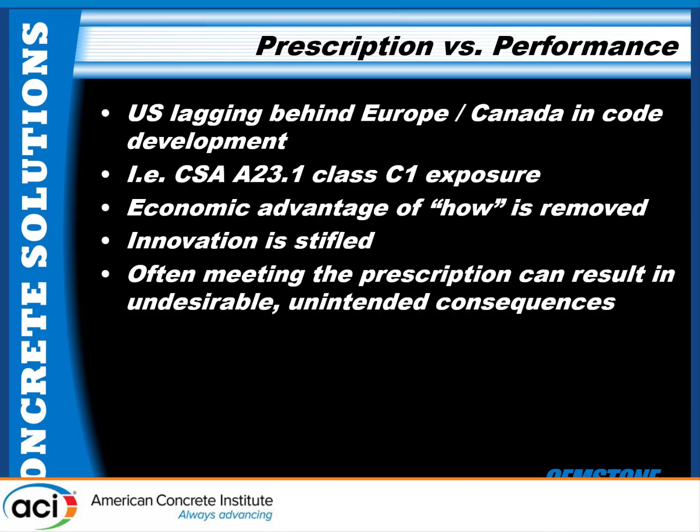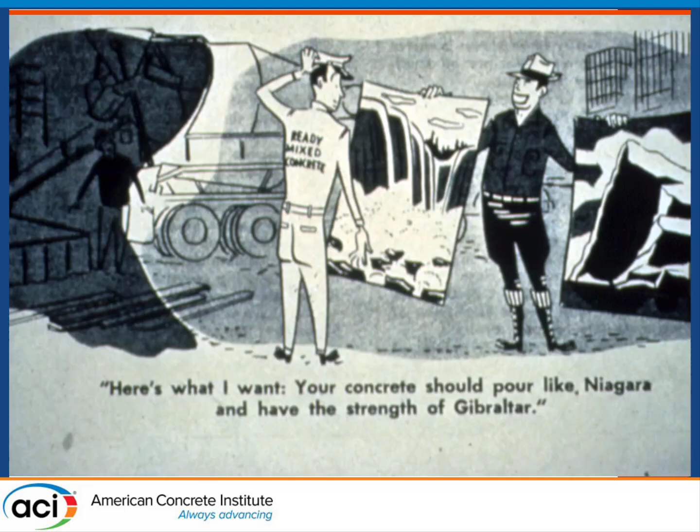Now, performance-based specifications have been around for a long time. This is a cartoon that was quite popular when I was in the ready-mix business. You could tell you were a ready-mix concrete producer because you had that hat on. And this gentleman, being a very good Canadian, says, I want your concrete to pour like Niagara, have the strength of Gibraltar. It's pretty straightforward, right?

We're not making this change because we don't like Portland cement. Portland cement is cheap, it's effective, it's available almost everywhere, it's somewhat predictable. We're making this change because we want to reduce emissions and reduce our energy needs, and history tells us, because the history of the development of Portland cement tells us, that we are going to encounter problems that we don't know exist right now.

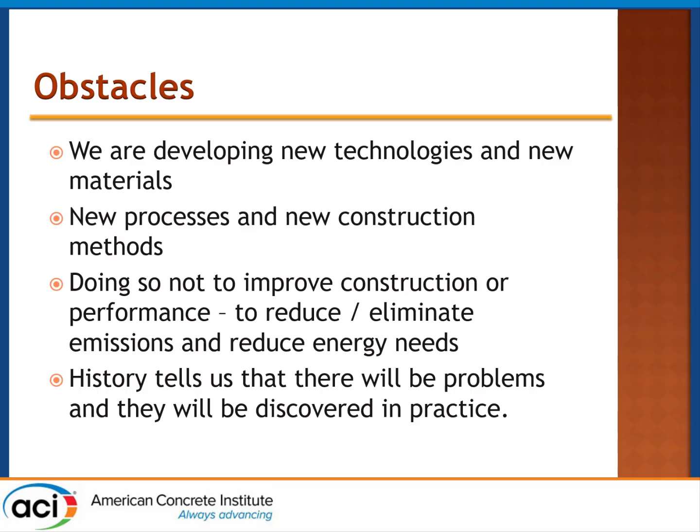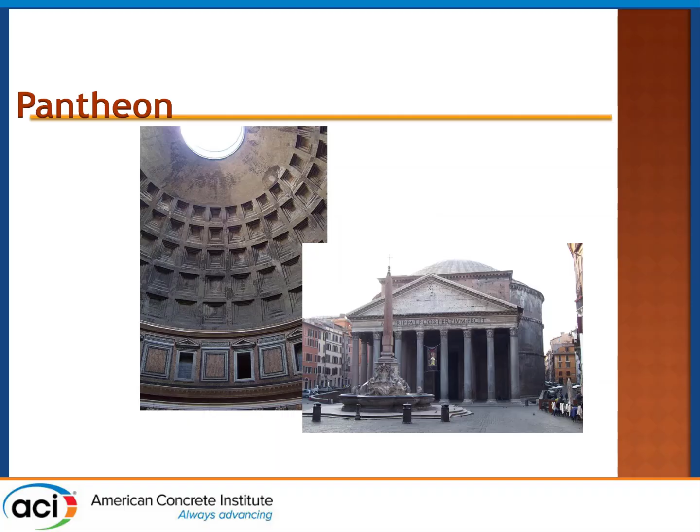Of course, we've been using concrete for a very long time. The Pantheon in Rome, it's got some lightweight aggregate in here, which no doubt was done to reduce the amount of cementitious material, hydraulic cement, and therefore reduce the carbon footprint of the structure. But for whatever reason, there's a lot of things that have been done for a long time, but we still use this device.

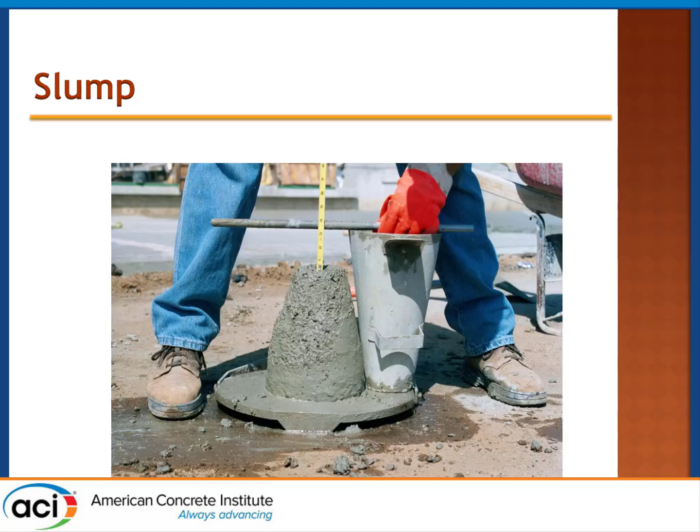And we will use this device for the foreseeable future. And it's been around for a while. Some of you may not have the 1929 version of the Design and Control of Concrete Mixtures, but it has the same table that you will find in ACI 211.

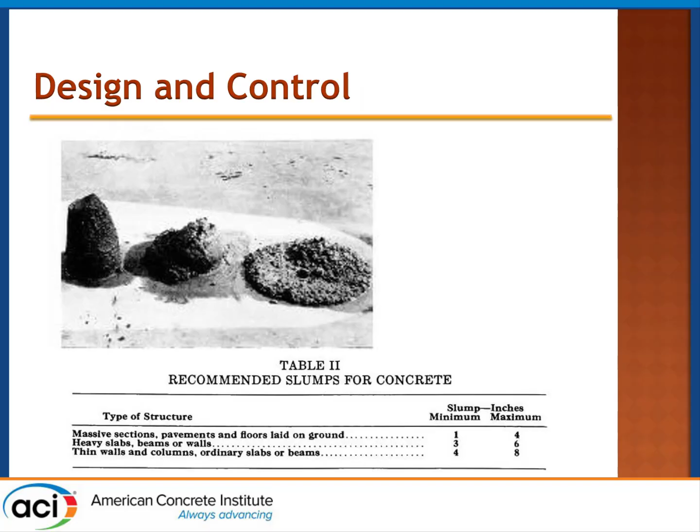A modern way of specifying it, because we can change that slump without changing the water, unlike 1929, is just to say, make the slump whatever is fit for the intended use, and designate a range.

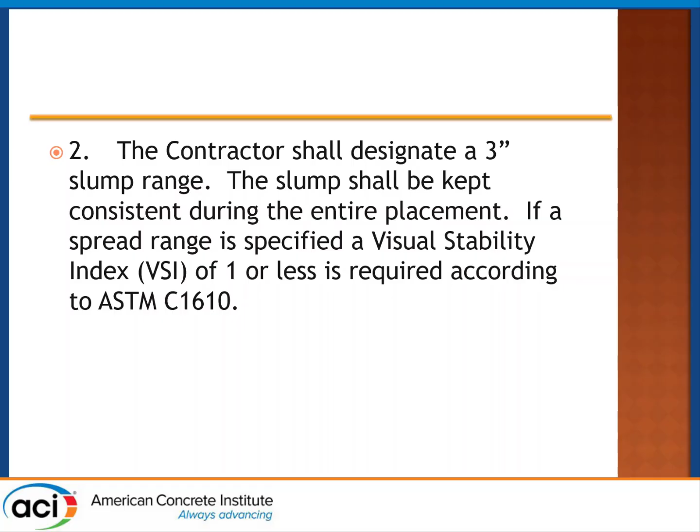And then if you're in the ready-mix producer business, if you keep getting a different slump and you think you're doing the same thing in each batch, one of those two things is true. And so you need to be aware that performance-based specification is where we're going to have to go, and it's going to require a change in construction methods.

The point being, if you don't communicate early on with the people that are going to construct the building, that are going to maintain the building, that are going to design the building, we can run into problems. It's going to necessitate more communication in terms of what is our concrete going to do, because we all know, right? We have a rule of thumb that, for Portland cement, your 7-day strength is 2/3 your 28-day strength.

That is true for mostly Portland cement mixes, even with a little bit of fly ash, a little bit of slag, or maybe a little silica fume in them. But I'm going to show you one example, and give you some case study examples.

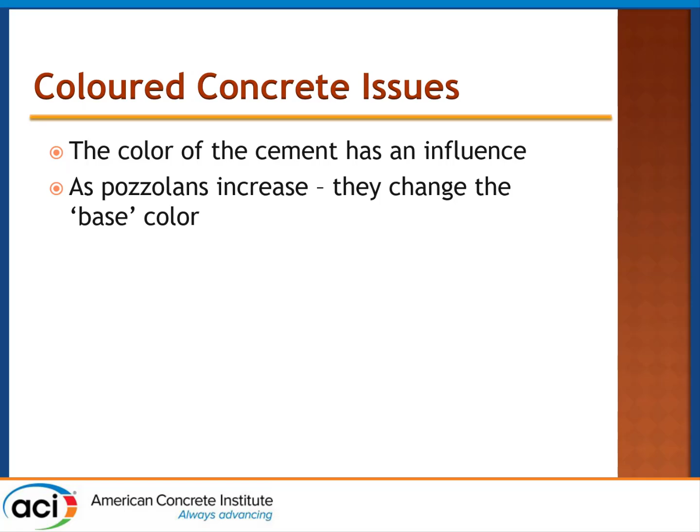The color of your concrete is dependent on two things: the pigment loading and the base color. This is a slide from Cemstone that has a very pretty printed chip, just like you'd get at the hardware store, showing you the color of the paint.

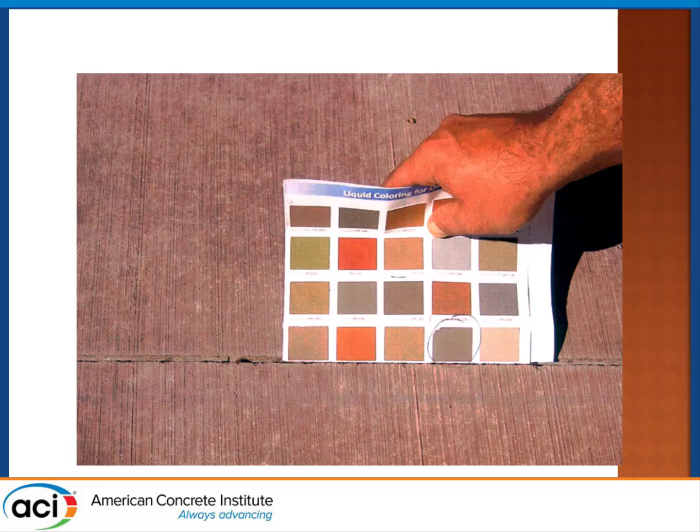The salesman told me, when I said this was a bad idea, that no one would ever hold this up against the concrete and take a picture. It only took four days. So we had a warning on the color card that said the result is going to be dependent on the base color of the concrete. It affected the color massively.

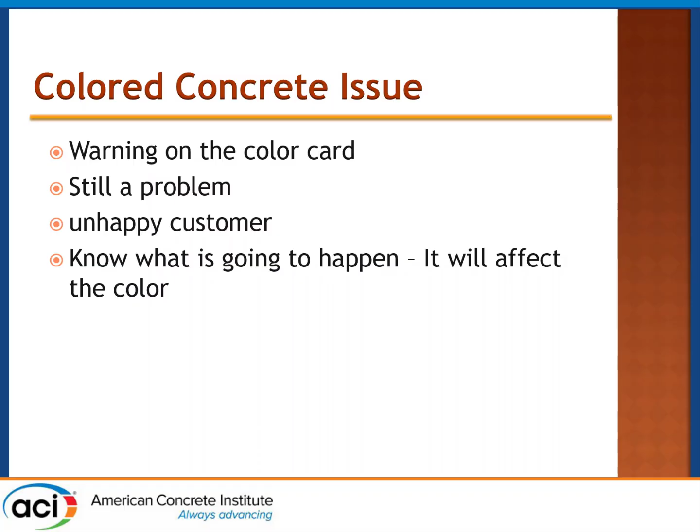What was the problem with those colors as we went to high volume fly ash in interior concrete mixes? People wouldn't like the color, and so what would we do? We would tear it out and do it again. So no matter how much clinker we didn't use the first time, we ended up using a lot more by doing it the second time. Plus, everybody wanted that. But that's not really why we're here.

We're here for structures like this. I've been doing low emissions concrete for a long time. This headquarters building, built in Minnesota during the fall and winter of 2003, is high volume fly ash, 65% fly ash.

Great River Energy owned power plants, and some of their power plants sat in Wyoming on the Powder River Basin, where the coal is very consistent. Therefore, the fly ash was very consistent from their base-loaded plants. And they said, I want this building to have as much fly ash in it as possible.

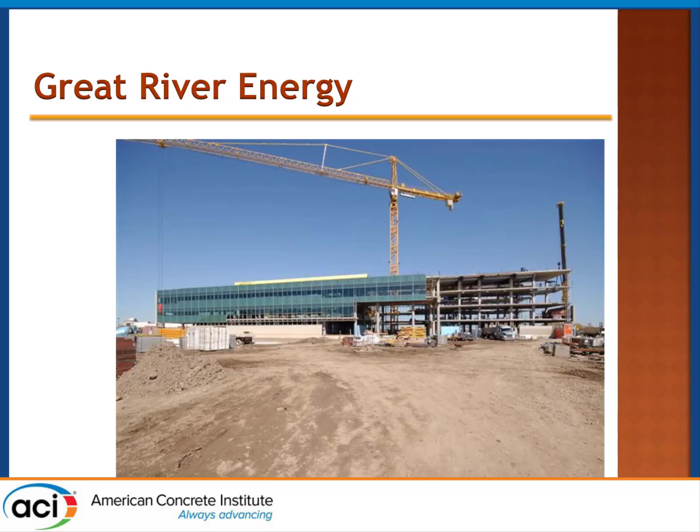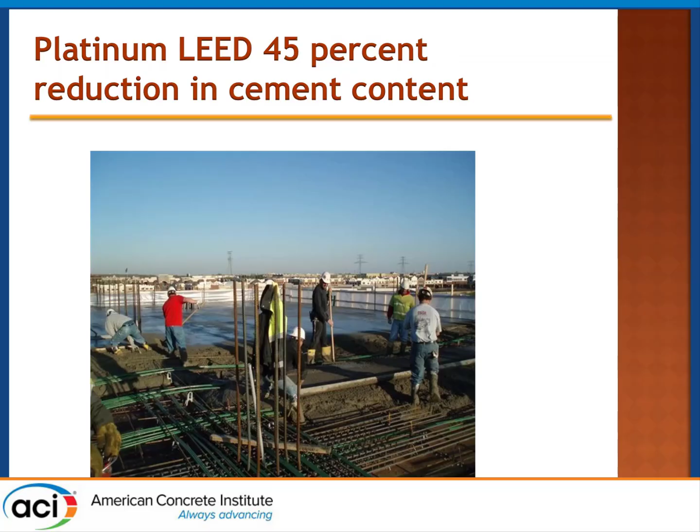The architect called me up and said, how much can we put in? Thinking, I want to go from 25 to 35. And I said, well, 65 without doing too much work, and we could probably do better than that. So we had a target for platinum LEED. It was a 45% reduction in our cement content, our ground clinker and various other things, and we met that requirement, and the owner was very happy.

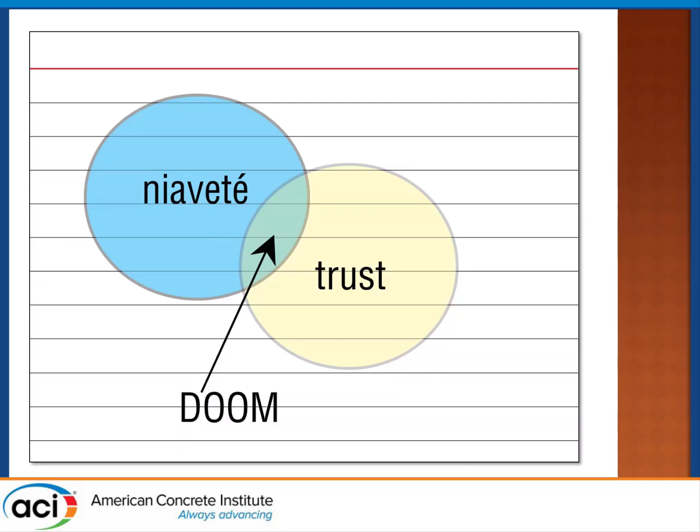The problem is that sometimes you can end up having an issue. Now, this is 20 years ago, and of course we say, well, we'll go to 60% replacement, but you only want 45, so we'll up the cementitious material, which isn't the biggest change.

However, I then gave a presentation in a room much like this one, and I put up the mixture proportions, and somebody very carefully transcribed them down in writing. Then they said, now I have a recipe for making that high volume fly ash concrete. And we listed the admixtures that were used. They only changed the admixtures - cementitious material source, same fly ash.

But if you go from a polycarboxylate, which has a tendency to accelerate, and switch that in with a lignosulfonate, a wood-based material, it isn't quite the same.

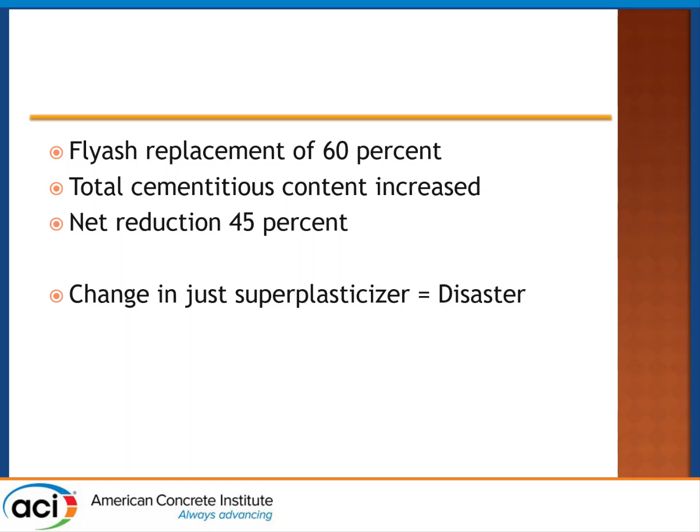And then to make it worse, this next placement was done in the winter, in February. So on day three of the concrete not setting, the contractor called me up. I was working in the ready-mix business at the time, and he said, your concrete isn't setting. And I said, what are you talking about?

You used brand X for that project. Right, but they used your concrete and it's not setting. You've got to come down here and fix it. So being the engineer, right, I got to go solve the problem. I can't just tell them to go away. And so we ended up heating it up.

And of course, that was simply retarded by the presence of the admixtures. Here was a mixture that had worked very well - the contractor was extremely happy with the way it performed. Change one little ingredient, don't do any trial batching or trial placement, and you end up with trouble.

Of course, anyone notice the problem with the winter concrete? Do you see the top of the footing is already turning white, which means it's already frozen? But that's okay.

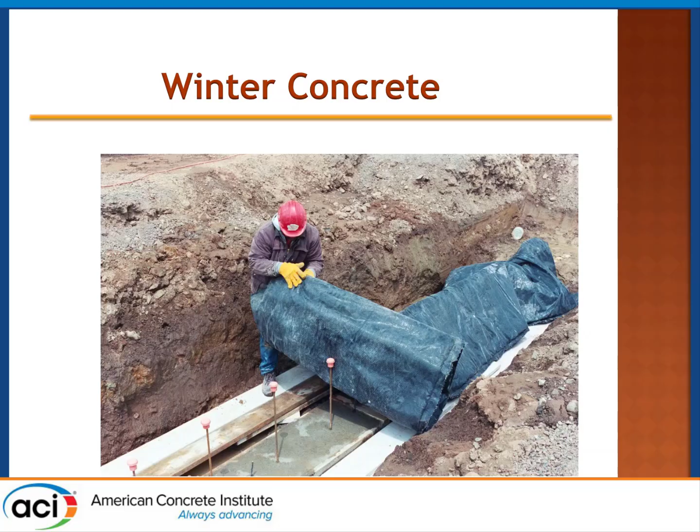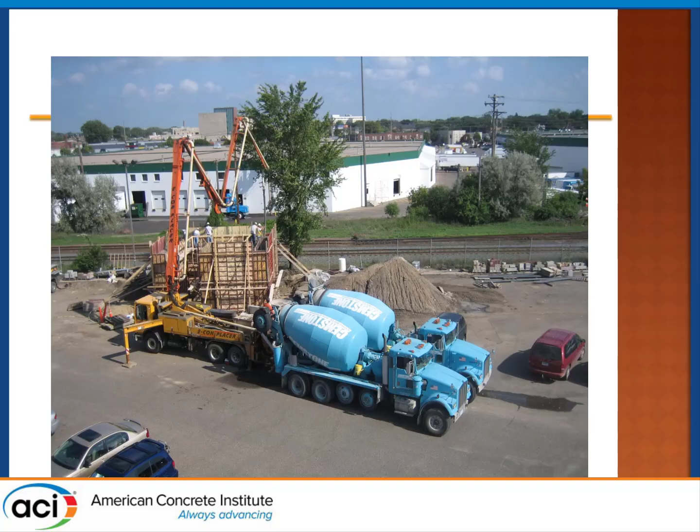A colleague of mine, Dick Staley, had to build a radiation bunker at their facility in St. Paul for holding their nuclear density gauges. He said, what would be really cool is if we made concrete that is as environmentally unimpactful as possible. This would have been 2005. So we made concrete that has almost nothing in it - it has 2% by mass virgin material. All the aggregates are recycled, all the water's reclaimed. The only new material is a little bit of Portland cement and a very little bit of admixture.

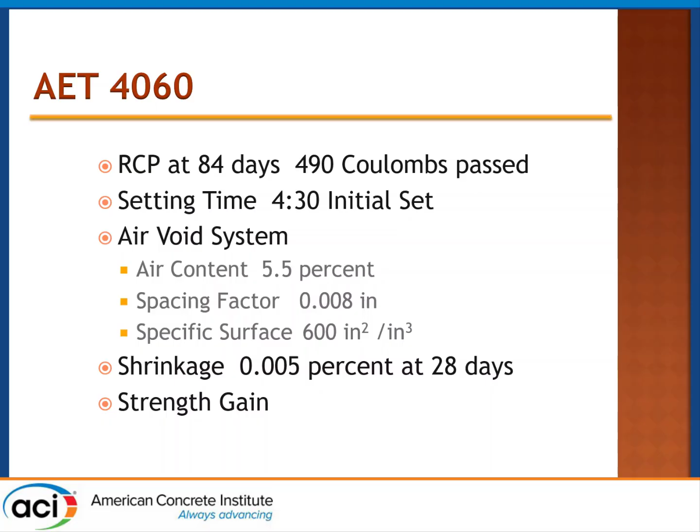He ran a bunch of tests for us, and we got rapid chloride permeability at about 490 coulombs passed. Setting time was reasonable because we knew what we were doing. This was based on concretes we've been doing for mass concrete that were about 15% by mass Portland cement, about 580 total cementitious. Air content looked good, and the strength gain was fairly respectable. Out at 90 days, we're about 4,500, and these are laboratory cured cylinders - we're going to come back to laboratory cured cylinders in a minute.

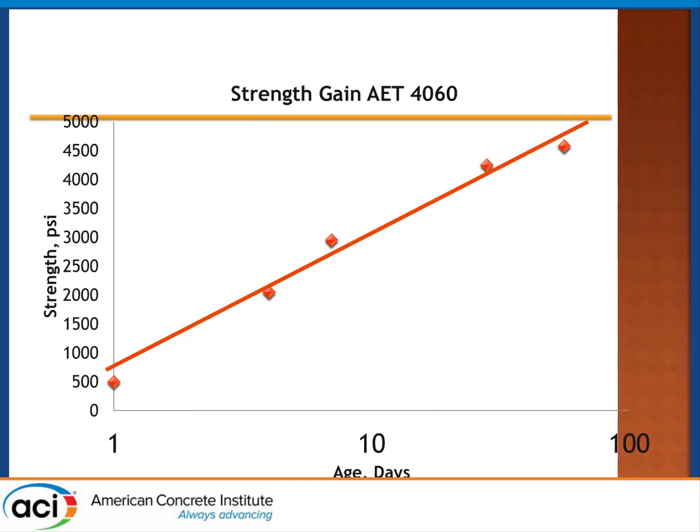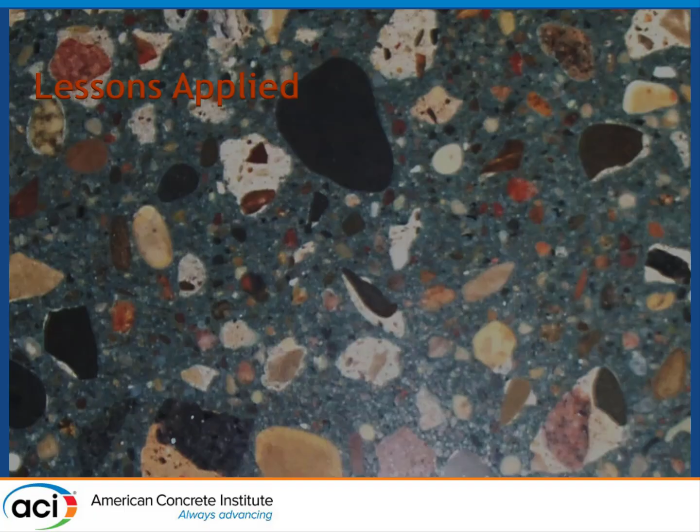The concrete looks really nice. You can see the very green-blue paste that's full of slag and the recycled aggregate paste. Some of those recycled aggregates are completely stripped of paste fraction, and some of them are all paste fraction.

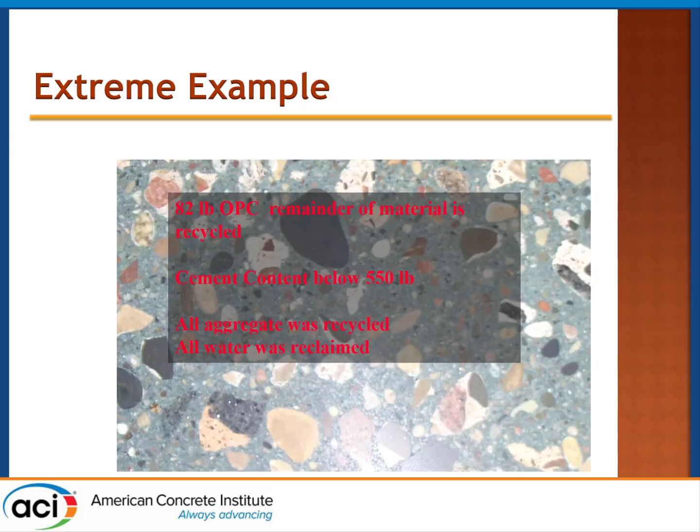82 pounds of ordinary Portland cement - everything else was recycled, all the water was reclaimed. We were surprised - we've been doing this for mass concrete, and we were surprised at the durability. This led to us designing a bunch of concrete for a bunch of high-performance bridges throughout Minnesota.

I'm going to attract your attention to just a couple of these mixes. This first one is 80 pounds of cement, 360 pounds of slag, 90 pounds of fly ash, total 530 - it has 4,000 PSI laboratory cured strength at 90 days. There's another good one here, specified to be 7,000 PSI at 56 days.

It has a little bit of silica fume, a little bit higher cement content, and this material is used in post-tension transfer beams on the bridge that have to be pulled at an age of 2 days. So obviously, if you're only getting 6,300 PSI at 28 days, you must not be getting very much early on - but that's not the case. You were able to design the mixture so we got great performance.

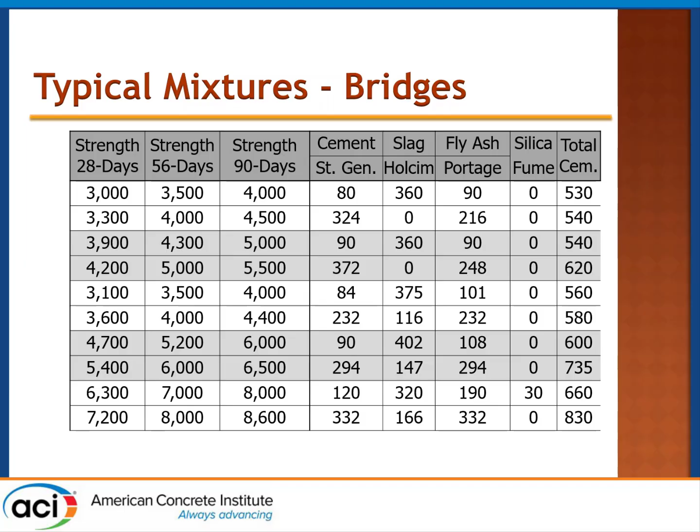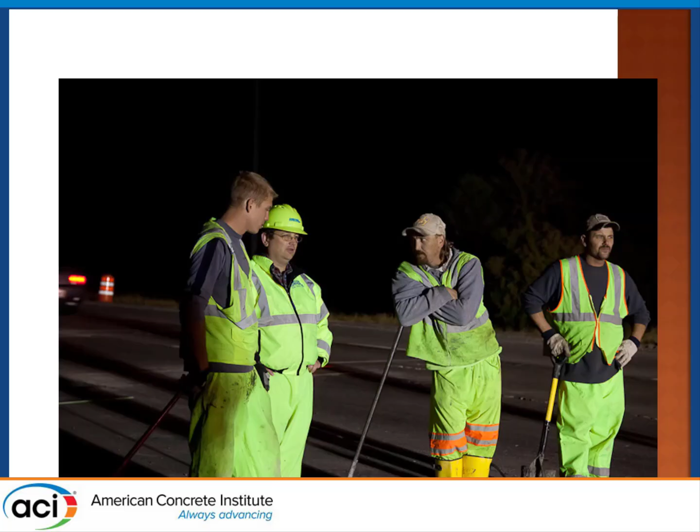Now, of course, regrettably for our colleagues at the concrete placement, they found that there was an influence that would come out from time to time to strip them of productivity. This is the pontification method of attempting to explain to the finishers why the concrete looks so different. You'll notice there's a couple people paying attention - there's one guy like, would this little guy ever shut up?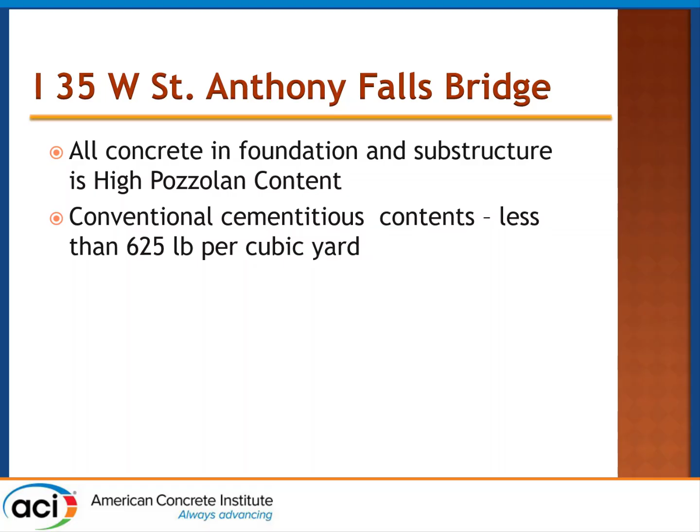We did these materials in very severe weather conditions. Conventional cementitious content, similar to what you were seeing, 625 pounds per cubic yard, is for precast elements. Here are some elements that are 32 foot by 16 at the base, 16 foot square in the middle, placed as mass concrete on a very exciting day in February.

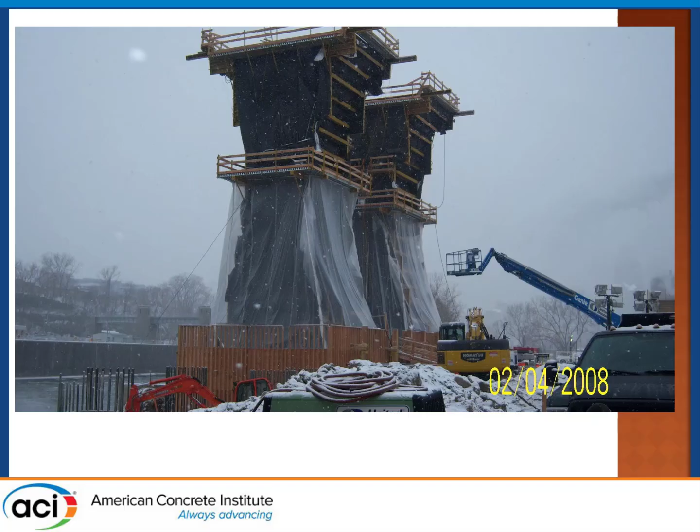of 2008 in Minnesota. The crews that built this structure believed they were going to be spending the winter in Southern California. There were a lot of very sad people who would often ask questions like, not how, but why would anyone want to live here?

You can see that the structure went fairly well. Those of you who recognize what happens with slag will see that this mixture is full of slag. The performance was terrific. These forms had to be reused - you can see that they are hanging the forms on and getting ready to pull the forms, getting ready to do the twin structure on the other side. They had to strip the forms in 3 days, so they said, can we do this?

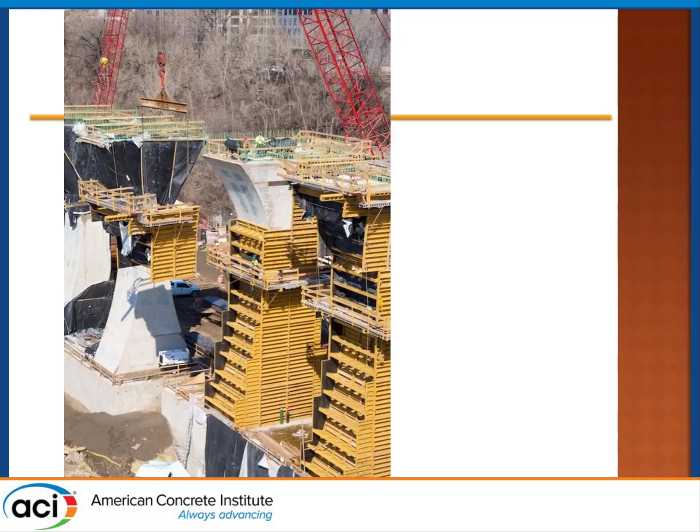And I said, well, probably not by accident. So what we did is we probably had the only mass concrete placement in history where we enclosed it and heated it up to 100 degrees for the first 2 days, so that we got it nice and warm and got the maturity we needed, monitored all with maturity. Had we been the ready mix producer and not on the design team talking to the contractor every day, the contractor would have gone to the third day and said, what do you mean I can't strip my forms? It's in my schedule. Costs incur. And what happens when we incur costs? We try to make sure we find out who else, or who, is to blame for them.

But I'll give you a less structural but more relevant problem. There's a patio that was constructed, a restaurant in Wisconsin, stamped concrete with broadcast color. The architect required a high pozzolanic replacement of 50% fly ash, and this did not make it down anywhere further than the lab or the plant level, where the plant said, oh yeah, we'll just pull out 300 pounds of Portland cement and substitute in 300 pounds of fly ash, which immediately gives us a yield problem, so I can get the accountants interested in the problem. Then I get some real traction.

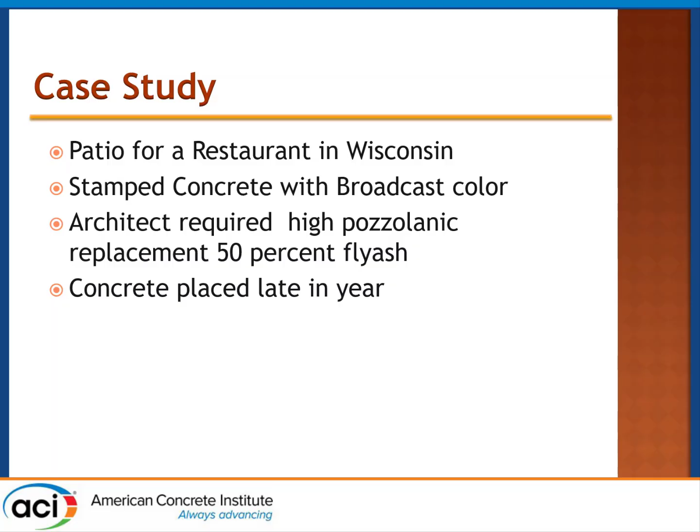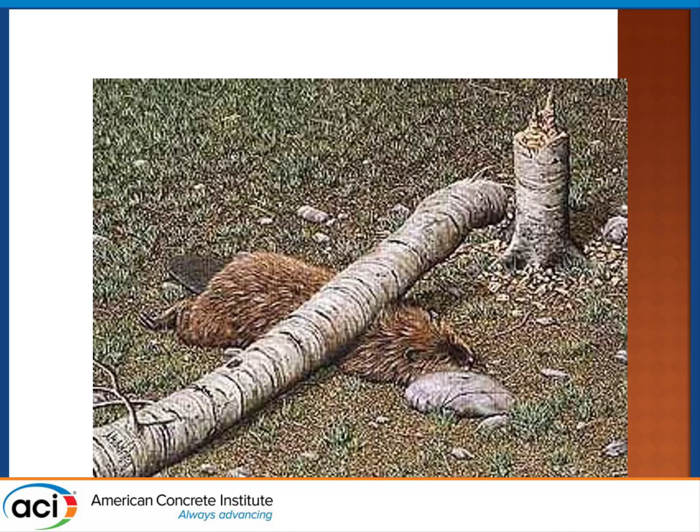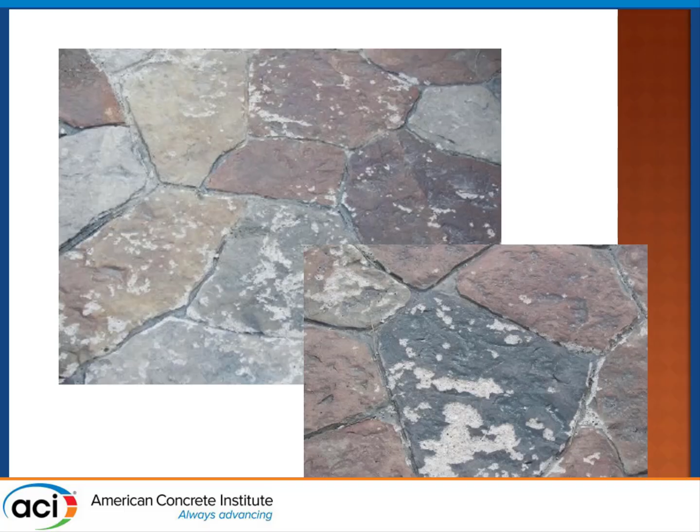The concrete was placed in October, and even if you're born to do engineering work, things can go badly. There was a great award ceremony in December, and the head of sales and the president of the company and everybody else went. My invitation, because they know how much fun I am at small talk, was intentionally missed. But I got to go to the meeting in March, because in March, if you don't cure the concrete, you are going to have scaling. You can get an idea of how the concrete once looked. It doesn't look like that anymore, and it had to be removed and replaced. So these type of things can cause us lots of problems.

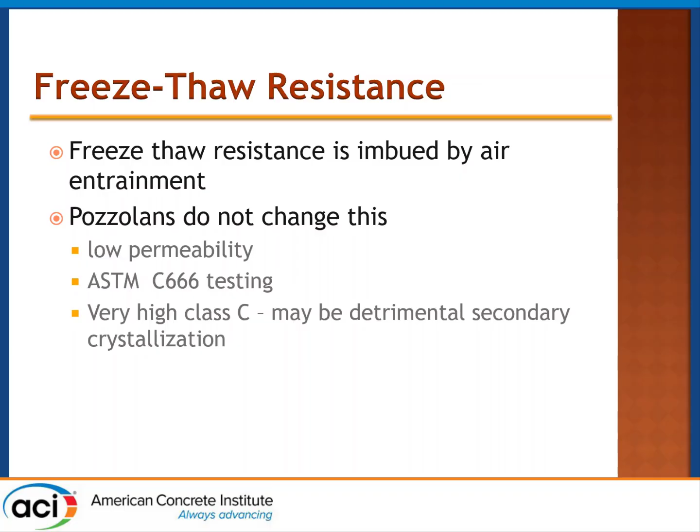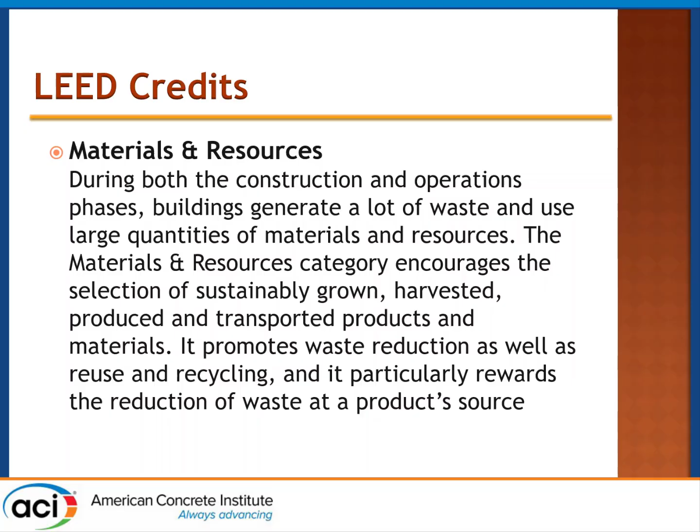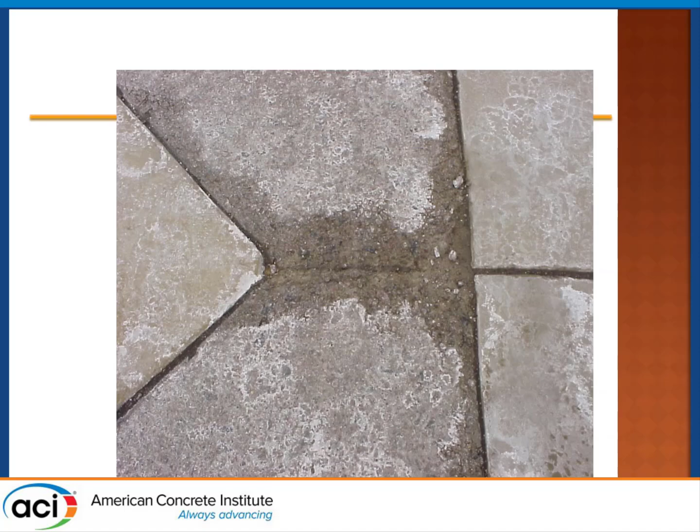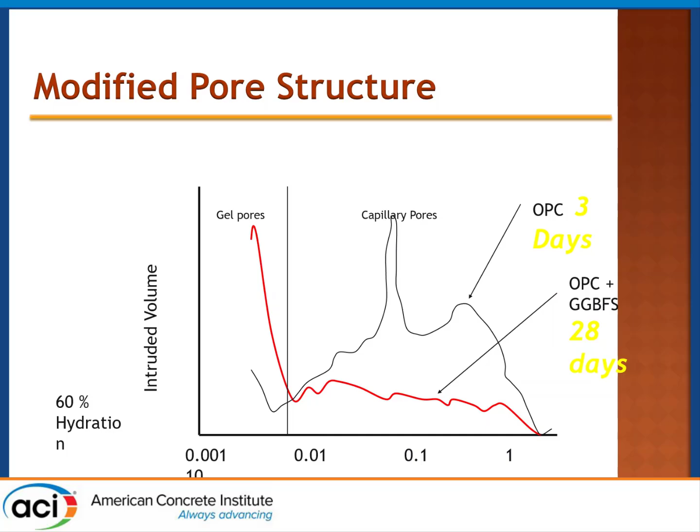The reason we're seeing some of these problems is we can find in the literature a beautiful curve that looks like this. There's the intruded pore volume for ordinary Portland cement in black, for 50% slag in red. But what they don't tell you is that one of them is measured at 3 days and one of them is measured at 28 days. So frequently, scaling is the first indicator that we have incompatibility, similar to the setting.

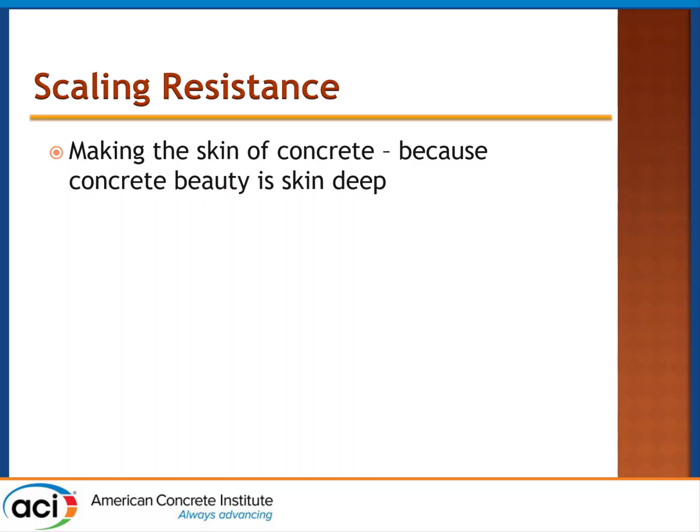And to close this off, because we started with scaling, concrete beauty is only skin deep. This is the Hastings Bridge, a bridge across the Mississippi River at Hastings, Minnesota. You can see the existing structure, a steel arch truss. Steel bridges became very unpopular in Minnesota after the collapse of the one downtown, and so we took a bunch of them out and replaced them. This is a tied arch, and it's a very pretty structure. From a structural point of view, it's really interesting because the arches and the beams that are connected were cast at the side of the river, floated out, and then jacked in place.

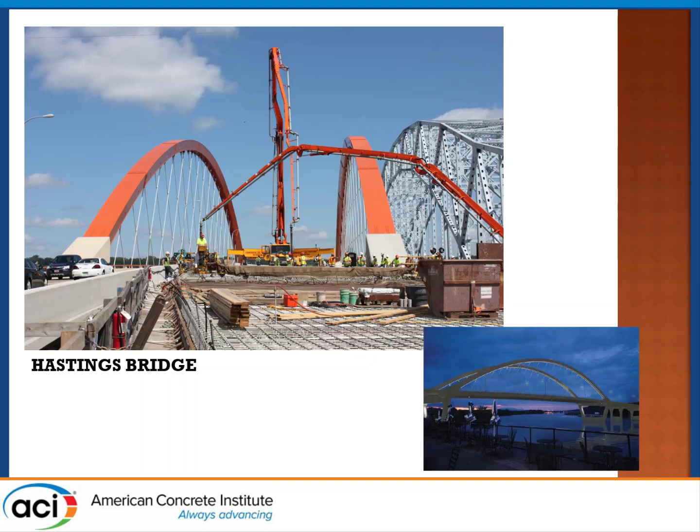This was probably not the headline they were looking for that next spring: Hastings Bridge, flaking concrete, not unsafe, MnDOT says. And you can read the rest of it. The surface is scaled because the concrete that was put in place used 80 pounds, rather, of Portland cement, about a 90% replacement, 95% replacement in this case. But the specification said, at 48 hours, for all balustrade walls, you remove the forms and you sack rub it.

Concrete that is meant to be hydrating in a mass element at 140, 150 degrees, at 48 hours, in an element that's only 8 inches wide, is not very mature. And so it scaled dramatically.

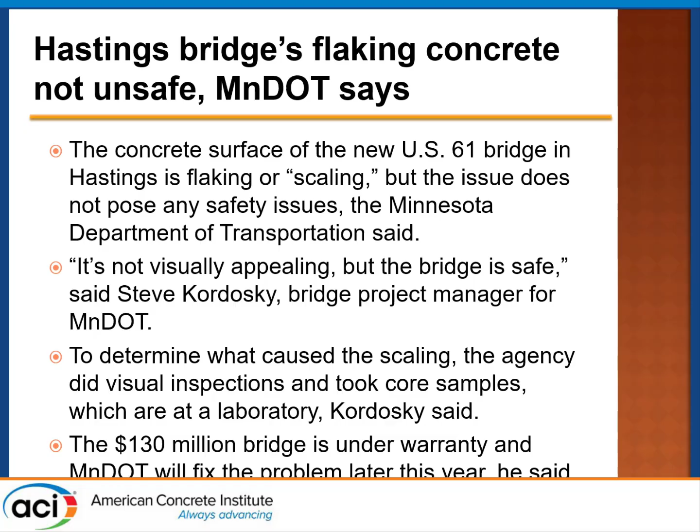Below that, in about 3 millimeters, after that sacrificial layer of paste was gone, the concrete was fantastic. We ended up removing all of it under warranty work - I think it's a defect in the design - and replacing it with a cementitious material that's still there. They commented some of it was flaking off where an 18-wheeler ran into it and appears to have ridden up on the balustrade wall for a little while. It's flaking off there; other than that, it's in great shape.

We have unclear responsibilities as we go into these items - I'm talking about things where we're putting a little bit of limestone in our cement. All these things are absolutely necessary from a sustainability, climate change point of view. But we're going to have performance issues, and we're going to have to change the way the structure is being built, which isn't a problem so long as everybody knows that beforehand.

Ward Malisch and Bruce, when they were at ASCC, and when I was chairing the P2P committee for NRMCA, put together a document that talked about what your concrete is going to do at 70 degrees, at 45 degrees, and at 90 degrees. So you had a skeleton for having that very discussion.

Because if you find out that it's set so fast you can't get anything done, or it takes 3 days to set, that has a tendency to interfere with the schedule. And the schedule, as you know, Mike, is a suggestion - you just follow it, and if you don't, well, you didn't follow it.

That's okay. The one thing I do know from teaching in construction management is that the float belongs to the general contractor.

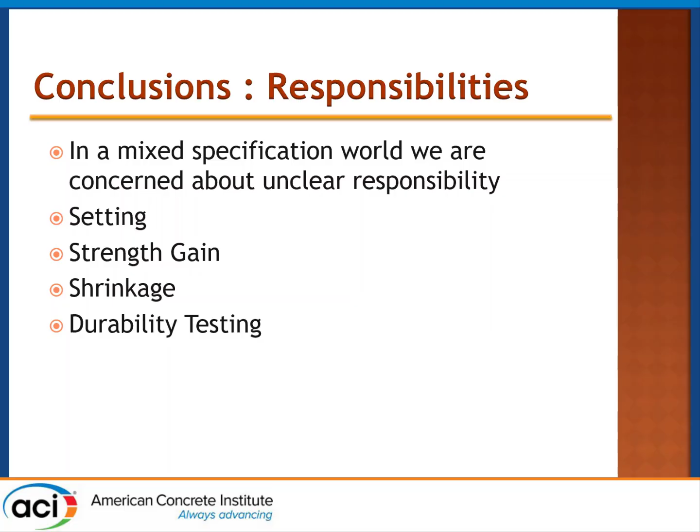So concrete is rapidly changing, and our codes and standards are not, and I would argue cannot, change as quickly. We need to reduce or eliminate clinker content of our concrete.

Well, we can currently use high volume replacement with pozzolan - 85, 90%. I've got structures that are two decades old sitting in the Mississippi River without any scaling, without any freeze-thaw damage. So I'm not telling you I did it in a lab - I made it at 200 cubic yards an hour using conventional plants and conventional people.

We're on the cusp of using materials that require massive infrastructure investment, where we're going to have to use sodium hydroxide, for example. People rationally talk about caustic soda at 10 moles per liter sitting in tanks at a ready-mix plant. It's not like the bad old days where you'd wash your hands with trichlor to get asphalt off in a lab, and maybe it might cause cancer - this will cause loss of your skin right now. So we need to know that.

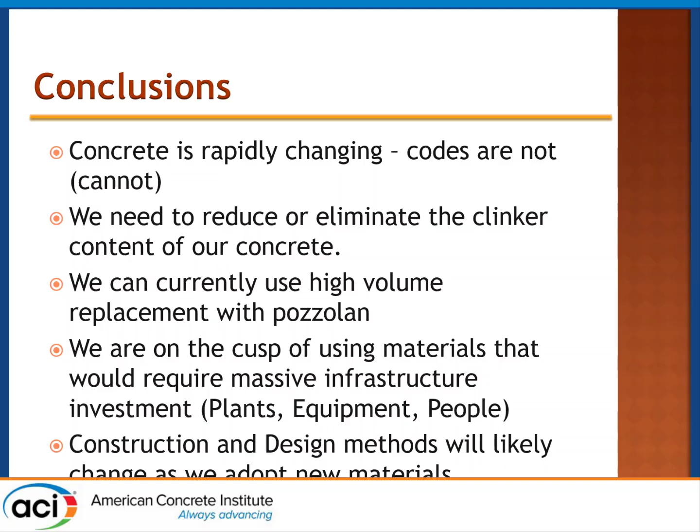And our construction and design methods are going to change as we adopt new materials. But we've done that before.

This is a core, right? Good thing I told you that - it's not so interesting otherwise. It's gap graded, proof that the tarantula curve is not new. This structure core was removed from the Port of Trajan, where it's been sitting in the Mediterranean for a couple thousand years. Looks like conventional concrete to me - there's no Portland cement in it at all. We've done it before, we can do it again now.

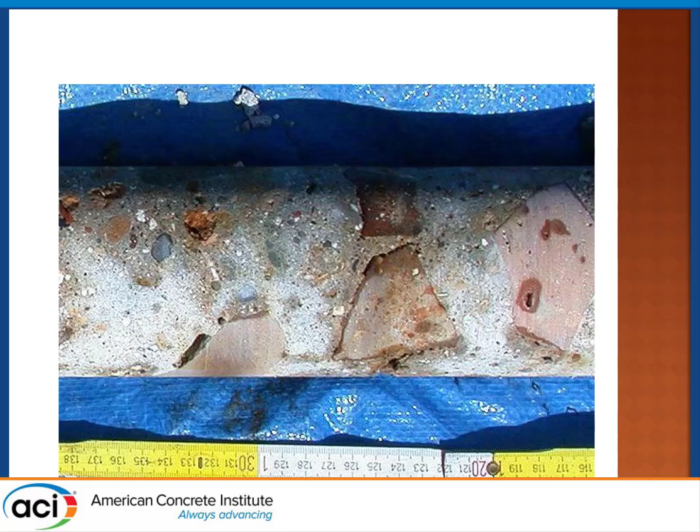Of course, they had different labor management practices they could use, and all of this concrete was rammed in place like Frankie piles. So those are the comments I have to get things started - that we have done all of these things, we've been able to construct with materials that are very low carbon.

However, the responsibility as to who's responsible when it doesn't set, who's responsible when it doesn't meet the schedule - all of these things need to be worked out before we go to construction. The attorneys will tell you that you can always get it worked out afterwards, but it's a lot simpler to do it beforehand. And I will turn things back to you, Jim.